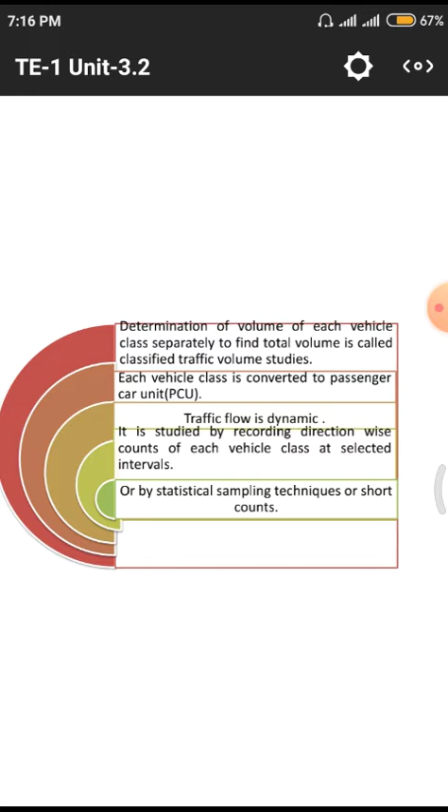These are the parameters used in traffic volume studies and their objectives, meaning the different parameters involved. We have to control different points, meaning controlling is required at different points in the form of turnings, traffic lights, and signals. We also have to give priority for different lanes through special design methods and facilities, since in some places we have politicians and other responsible people who need to move on a particular definite path so that there are no obstructions to their routes.

Likewise, we have highways of national importance, like high courts, supreme courts, and other structures with more political and social responsibility. For those places too we have to give priority levels and control the traffic plan through different operational methods and pavement design based on the importance of the structures. These high courts and industrial structures are important because more people move to those places according to their needs, so we have to give separate grading to those routes.

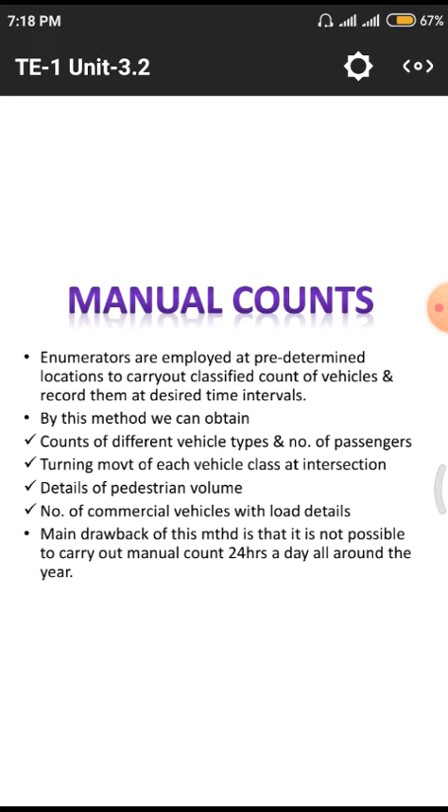A separate number of roads will be allotted to those particular places. This leads to classification of volume studies into manual counting method and automatic traffic counting method. To do volume studies, we have to use manual count and automatic traffic count systems. We need to understand the different parameters in manual counts, how they give data, and for what purpose we use that data.

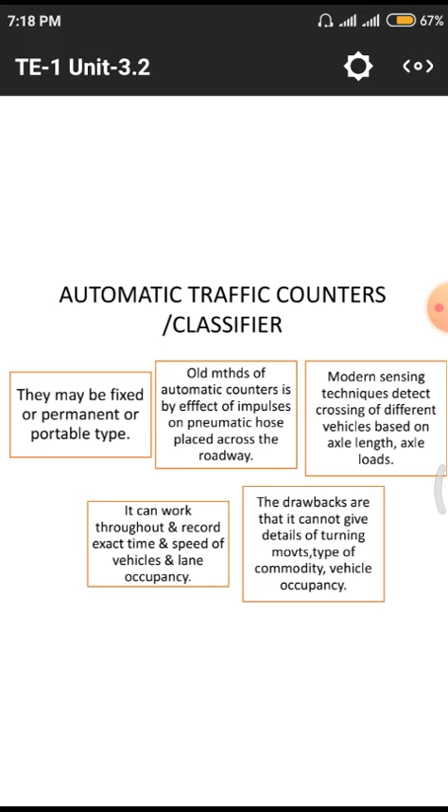Next is the automatic traffic counters: how they give data and what is involved in these automatic traffic counters, whether it is robots, other methods, signal systems, or sensors. We have different kinds of traffic counts, with different purposes and outputs. We also consider whether there is any interruption or any other special mechanism.

This is the main diagram showing how traffic moves in a particular cross section. It is a definite cross section, normally called a plus cross section, meaning it is in the shape of a plus. Similarly, we have the x cross section, where there is a huge angle of deviation with respect to the road, but in the plus cross section we have only 90 degrees and 180 degrees.

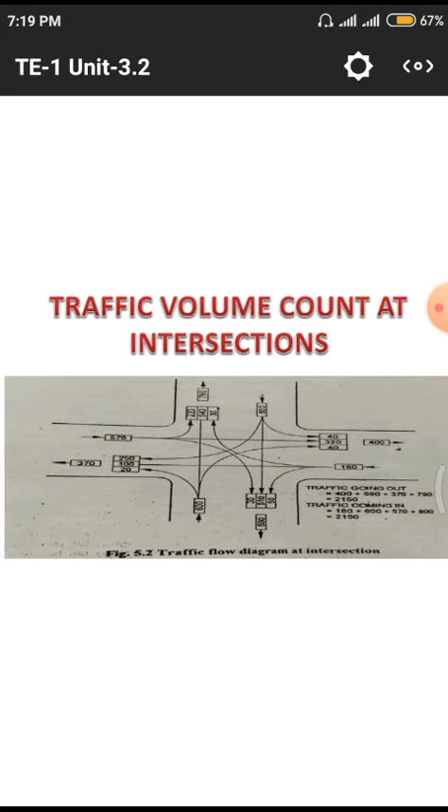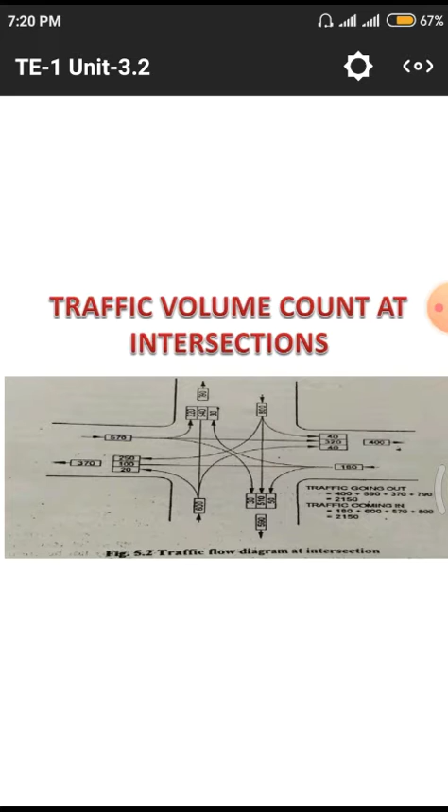That is the angle of inclination between the straight road and the 90 degree road, making it a plus road. In that plus road, vehicles move in different directions, straight, left, or right, so every vehicle on every road has these three movements, creating conflict points. Lane to lane we have some amount of merging, so in that area we have to use traffic lights and controlling systems in the form of police and other patrolling systems.

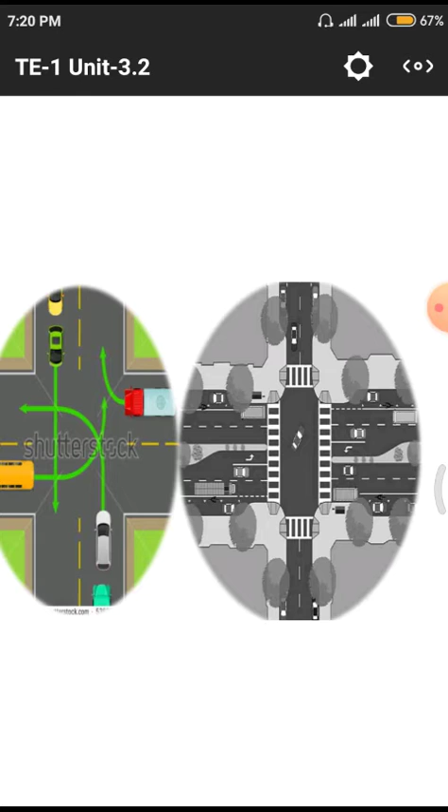This is the explanation about the system, both the old system and the upgraded system. In the old system, there were no particular traffic systems or police systems, simply vehicles were moving, so a lot of accidents occurred at these cross sections.

Nowadays, to arrest those kind of accidents, they are simply raising these kind of constructions, bypasses for some of the places. That means normal pedestrians have one kind of road, which has a marking system. We have these zebra crossings at particular points, and only in the zebra crossings pedestrians have to cross the roads.

In one direction it simply looks like a bridge - that means underpass and overpass. Underpass means vehicles which are moving below the ground level, those are called underpass. Overpass means vehicles which are moving above the ground level, those are called overpass. Underpass, overpass - these terms we have to observe.

Next is the presentation of traffic volume data. How we have to obtain this traffic volume data on the basis of annual average daily traffic. We have to collect the total traffic data in a particular year, year to year, or for 5 years, depending upon the increment of the population in a city.

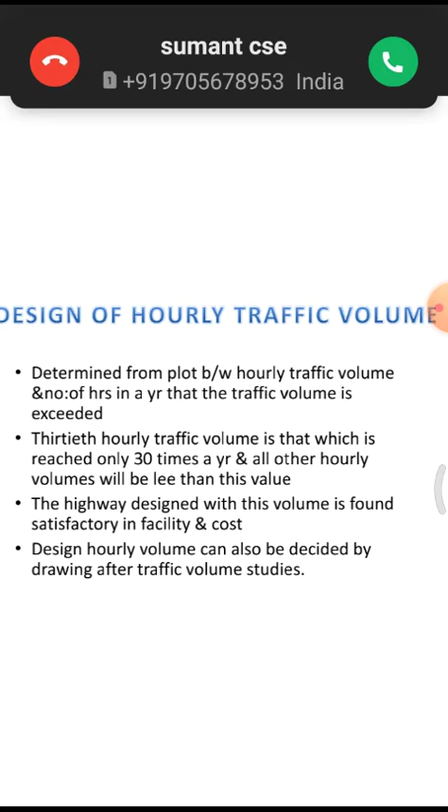So the highway is designed for the volume found to give satisfactory facility and cost. That means the 30th hourly traffic demand gives the maximum usage of the particular highway, so it helps identify which places we need to densify with roads.

Next, the highway is designed for a particular volume and found to be satisfactory with respect to facility and cost. The major purpose of highways is to move carrier vehicles and other commodity vehicles, so those highways must satisfy the needs of the vehicles traveling on them.

If there is a shorter span of highway with a huge quantity of vehicles moving, there may automatically be a requirement for densification or enlarging the roads, from one way to two way, or two way to multiple lanes, depending upon the hourly traffic demands in particular areas.

Next, the design hourly volume can be decided by drawing after traffic volume studies. Because here we are designing the hourly volume, it can also be decided by using these traffic volume studies.

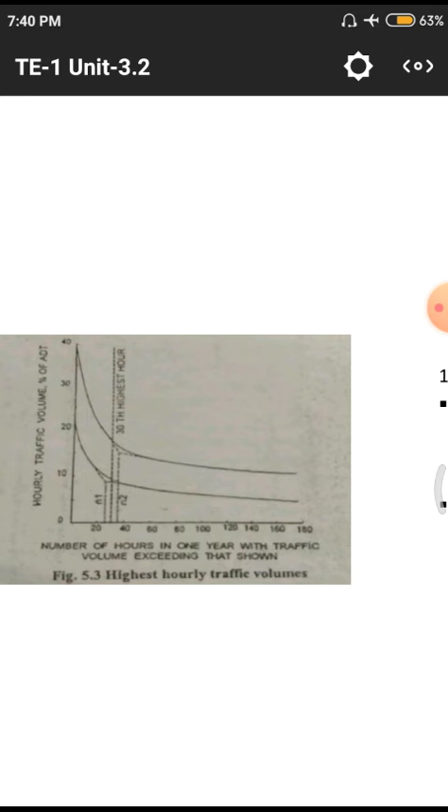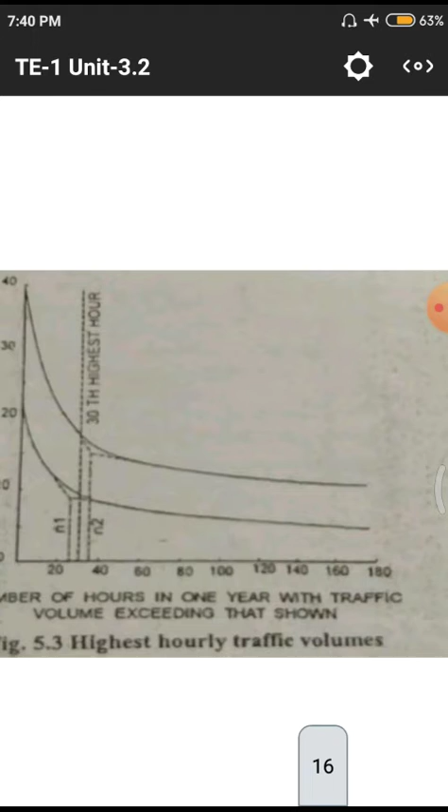This is the graphical representation. In the x-axis we have the number of hours in a particular year shown, like 20, 40, 60, up to 180. On the y-axis we have the hourly traffic volume percentage, that means 0, 10, 20, 30, 40, and in those particular periods there may be an increment.

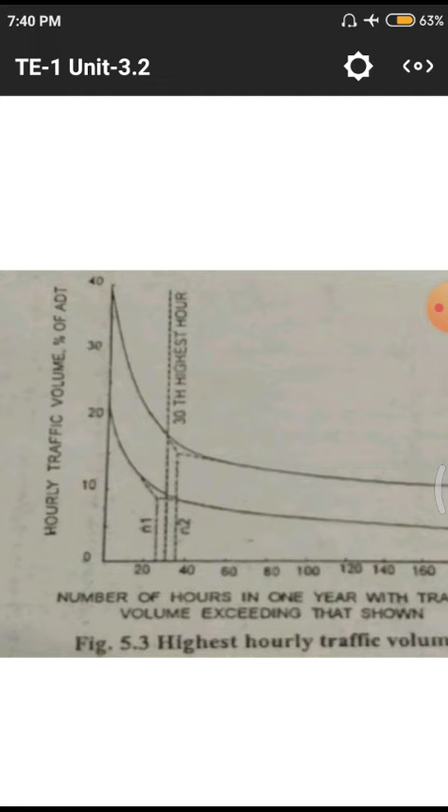How do we need to analyze this particular traffic volume data? First, we have to use short counts and adjustment. That means, what are the shortcuts we are having.

I will show with diagrams. If there are two roads here, and we start our journey from here and need to move, if there is any alternative, we need to simply connect these two, meaning we have to save a huge amount of distance to the traveler. So we need to have these shortcuts, meaning what are the different shortcuts to connect different places.

First, we need to observe to save on traffic, commodity and vehicle clashes, and also to greenify the particular area by decreasing fossil fuel usage. Next, adjustments also come under these shortcuts.

Because of the requirement of a large number of enumerators and time and financial constraints during traffic volume count studies, shortcuts are adopted. That means depending upon the vehicular usage for a particular place, different shortcuts have to be found. The shortcuts totally depend upon the vehicular movement from point to point.

Previously I discussed two points and drew a right angle triangle, so that the right angle triangle gives a solution. That means if we move in a diagonal pattern, automatically the total length of the journey decreases. Likewise we need to understand different routes and their shortcuts.

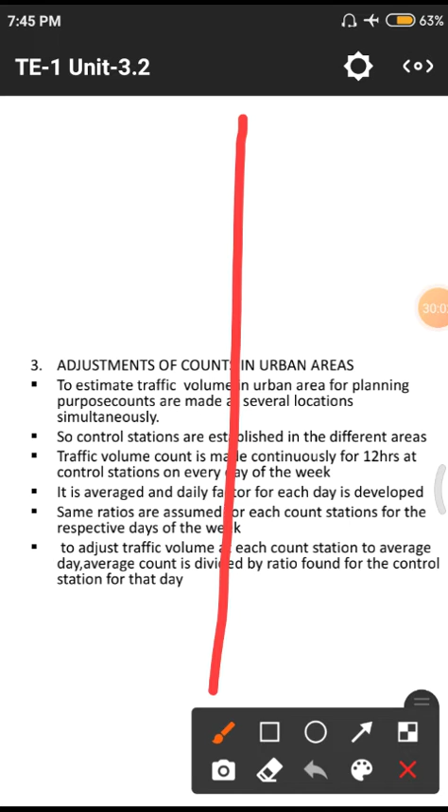It is a leaf-like pattern, where all the rays connect to a particular midline, so that it becomes easy to connect different ways within a particular length, making it easier to move. Next, control stations are established in different areas.

What are the control stations, and how do we need to utilize them? Simply, if there is any particular quantity of traffic jam in those areas, we have to control the traffic by expanding these roads with the help of bridges and other measures. Those are the control points, different control points, established in different areas.

Traffic volume count is also made continuously for 12 hours at control stations on every day of the week, using manual systems. This means some amount of persons are employed to count the traffic data.

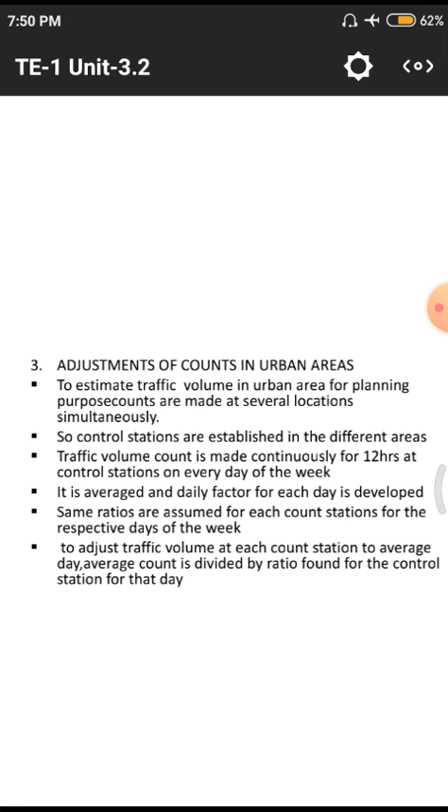For Vijayawada, what is the annual daily traffic? For the Prakasam district, what is the annual daily traffic they are having? So different states and different routes have to be considered for this data, because in those particular spaces we also have traffic flow from our state to another state, or our place to another city.

How do we adjust this traffic data - that means the daily factor. Daily factor means 7-day average for 24 hours. We need to take 24 hours of daily traffic, and that daily traffic will be converted into a 7-day average.

Next, the seasonal factor. In a year we have 12 months, and in those 12 months we have different seasons. So the seasonal factor is the 24-hour traffic volume for 12 months - that means 12 months divided by 24 hours traffic gives the seasonal factor, while 7 days traffic divided by 24 hours gives the daily factor.

Likewise we have different traffic factors. Average daily traffic equals traffic volume count multiplied by day factor multiplied by seasonal factor. That means for a particular day, what is the factor - if it is 1.5 or 2 or 3 - and what is the seasonal factor, automatically.

In the month of January we have the Sankranti festival, in December we have Christmas, and in March students have their exams. Likewise we have different factors for different months, so we need to multiply the monthly factor, daily factor, and traffic volume count to get the average daily traffic demand, which are the major contents.

All of these are responsible because of these controls. Once again I will revise—these are the traffic volume flow.

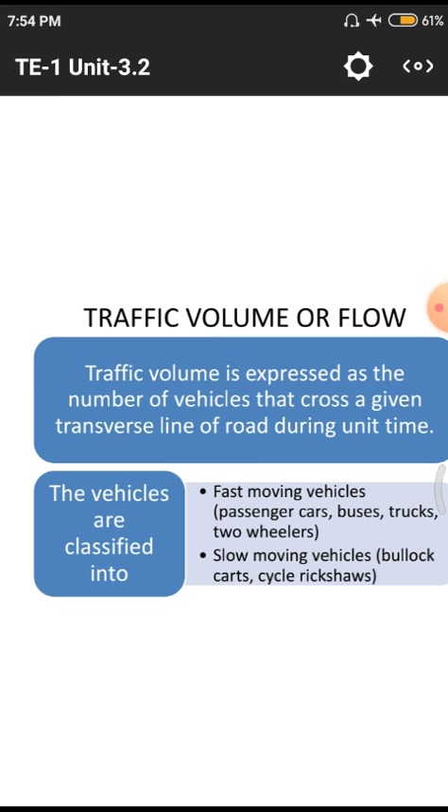In the traffic volume flow, we have to categorize the count of vehicles. After that we need to use the dynamic factors, the static factors, and understand the major objectives of these traffic volume studies.

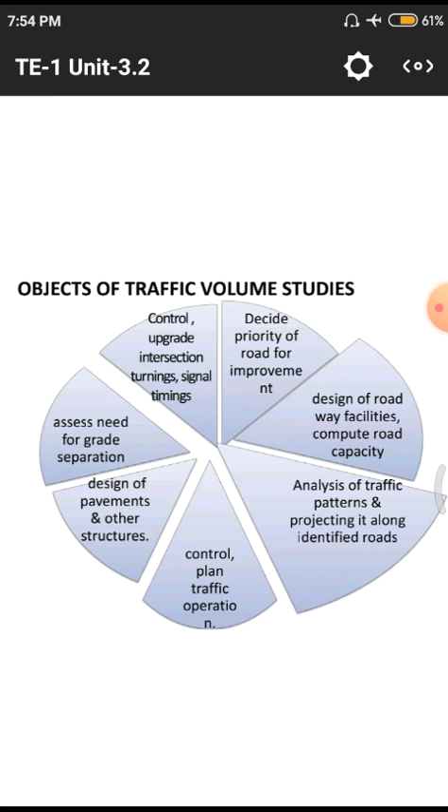First of all we need to control the traffic. After that we have to give priority to different lanes—that means different lanes we have to prioritize according to their design purpose. This is the manual count plus automatic traffic count methods.

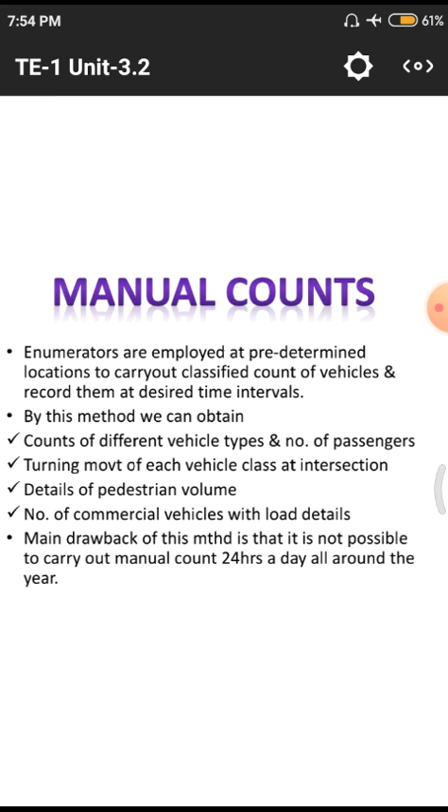How the manual count methods work, what are the different parameters involved in manual counts, what are the automatic traffic counters, and how they are classified.

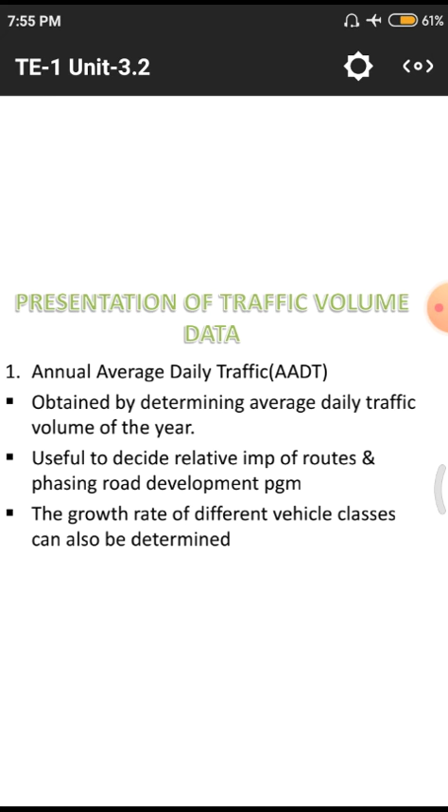Presentation of traffic volume data with respect to annual average daily traffic. To design the annual average daily traffic, we have to use different parameters: weekly, daily, monthly, hourly. Weekly means a span of 7 days, hourly means a span of 1 hour, that is 60 minutes. Similarly, different flow charts need to be designed.

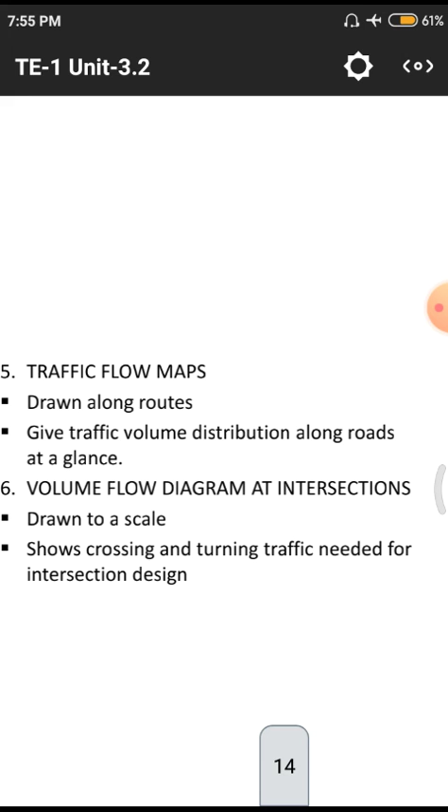These flowcharts and volume diagrams are responsible for giving accurate and exact values. This is the design of hourly traffic volume, and this is the flow diagram. Analysis of traffic volume and count days follows.

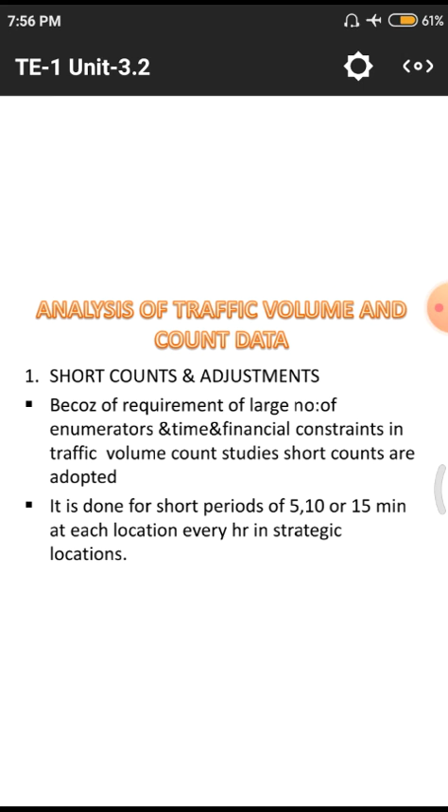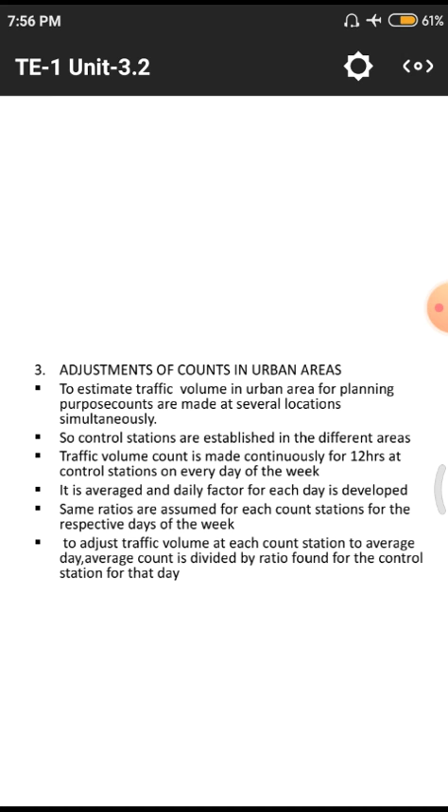First of all, we have to use short count methods and adjust different traffic lanes. Sometimes we need to expand, and sometimes use short counts for adjusting these traffic volume studies. For urban and rural areas, we have to follow different philosophies depending upon the vehicular characteristics they use.

How we have to calculate this data with respect to daily factor, weekly factor, and seasonal factor. By using those, we calculate average daily traffic, and after that, we need to calculate annual average daily traffic with respect to these factors.

Normally, what is the daily factor, weekly factor, seasonal factor, monthly factor, and so on? What is the peak hour factor after that? All of these are responsible for proper design of a road without having any collapsing—that means avoiding traffic delays or mergings.